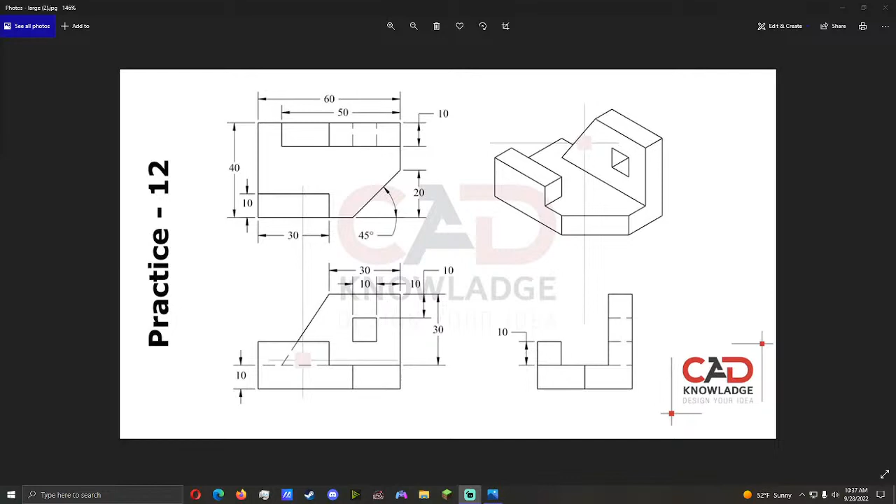Right now I'm just trying to make a whole new scene for this. Let's look for a game to capture specific window... it's not, well let's see, hold on, get rid of this. All right, you know what, let's just do this because I know this will work. We'll do... display capture, there we go. All right.

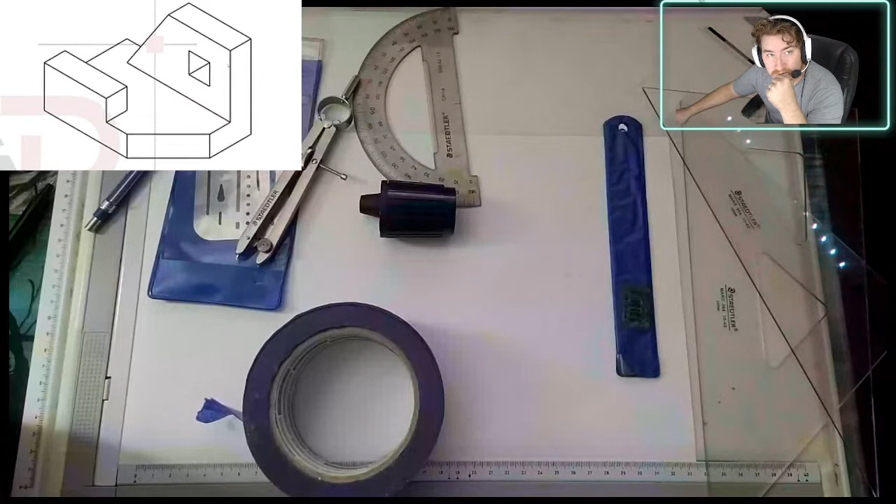See, now I can like... yeah okay, oh screwed that up... dun dun dun dun dun dun dun dun. All right, this and go right here, actually.

Welcome. This will be the absolute beginning of what I hope to become a series.

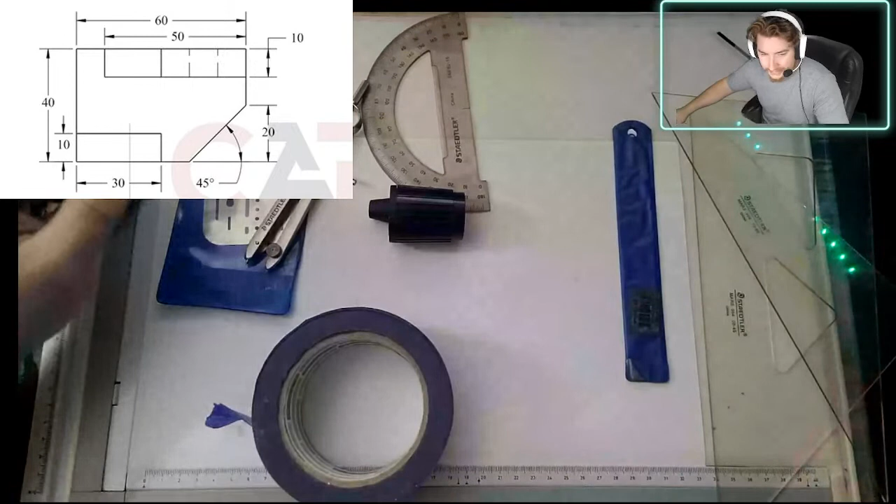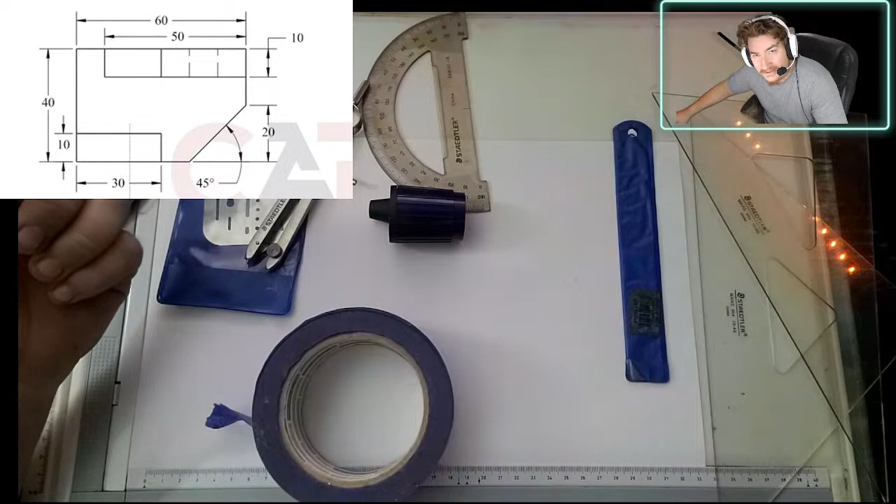We will be going through this and seeing what I can remember from this. God, was that almost 18 years ago? Man, so yeah, it's gonna have been a while. Anyway, I'll be explaining, and if there's any questions, please let me know. I'll try and answer if I know what it is. Otherwise, we're just gonna keep going along here and seeing if I remember what to do.

All right, so anyway, this is what I'm going to be drawing today. I have a ton of different tools. These are my triangles. Okay, there we go, sorry, they're kind of hard to see.

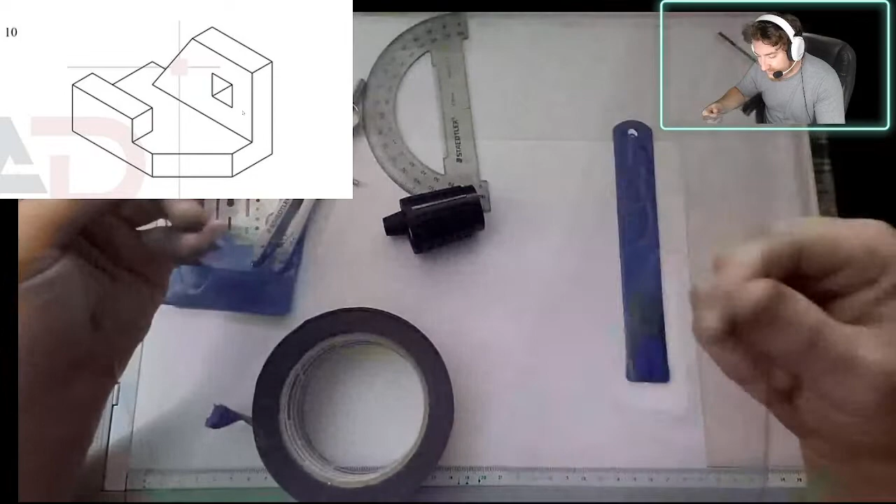I can't remember what these are. This is a 90-45 and this is like a 30-90-60 or something, this one I believe. Don't yell at me, I know I'm gonna get some of this wrong. Oh my god, these are from high school. I still haven't thrown them out, as I figured eventually I'm going to be using them again.

This drafting board is actually something really kind of cool. It was a gift for Christmas one time, and if you press right here, these edges pop up and you can slide the paper in, so that takes care of two of the edges, and then you just gotta get that paper tight. All right, there you go. Brand new, I smudged it. All right, cool.

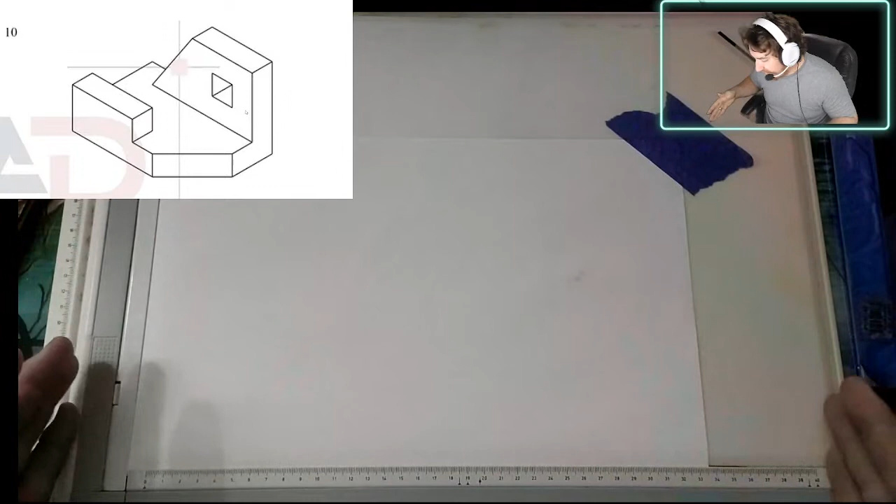It's a really cool piece of stuff. These rails on the side actually had pieces where you had a hole across the side, like a straight edge, and you could go up and down. It had things you could attach to it. I did get another one by accident, so I might bring that one out, but I don't want to open it because, I don't know, I just don't feel like opening it. I lost those pieces a long time ago, and that'll just be that for them.

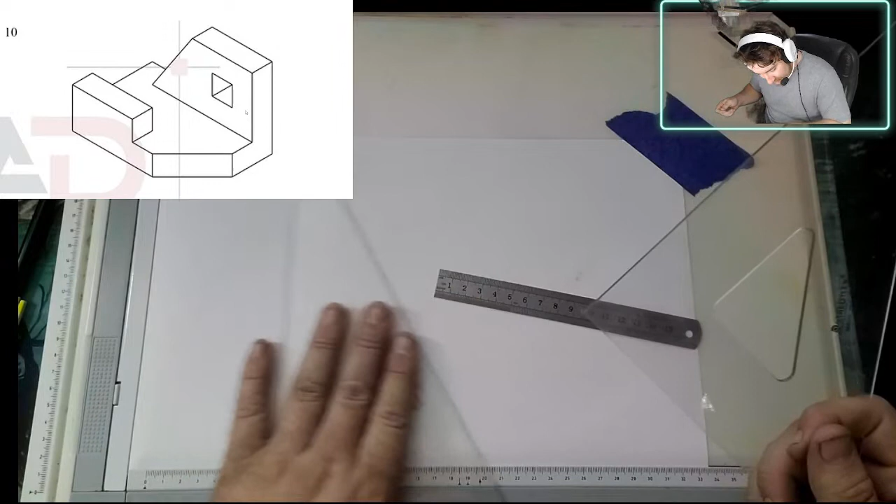This is the star of the show. I will be using a metric ruler because I like drawing in metric. Inches are confusing and scary, metric is so much easier to understand when you're drafting. A lot of stuff will be in... maybe I do need that piece. I mean, I can get along without it, but... I might get that piece, hold on.

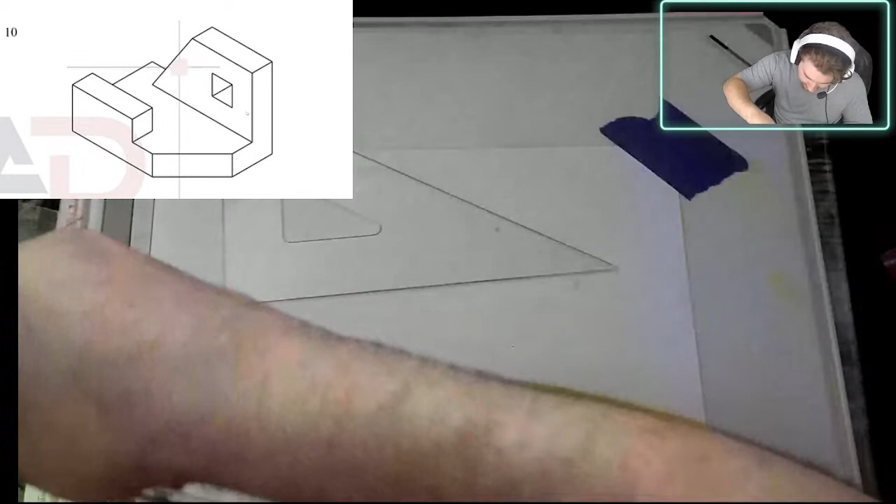So this is one of the other pieces I was talking about. It's supposed to just slide in, slap down, and then these work much nicer. But it doesn't really want to slide at all. Oh okay, I got it - it only wants to go up.

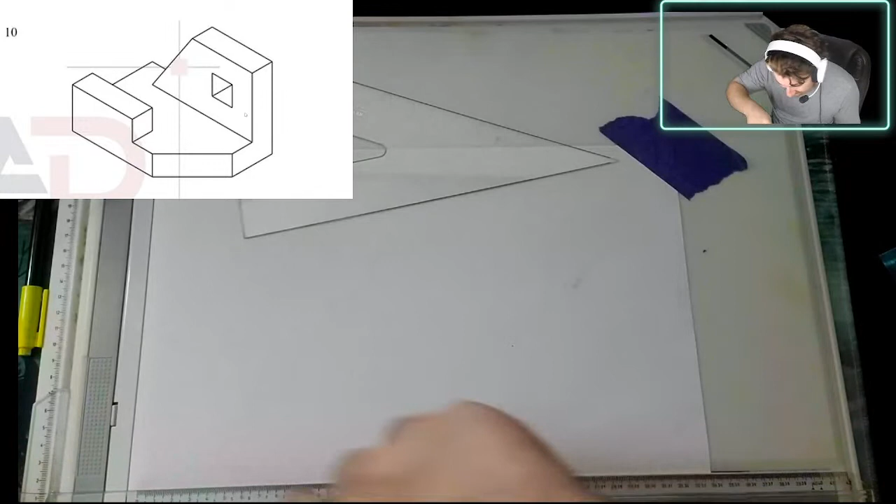Now see, that's very interesting. I don't know if you can see it, but on here, zero doesn't line up with zero on these, but it's relatively close. Well, that's just kind of disconcerting though. One of these is very off - when you get to the end, it's about a millimeter off.

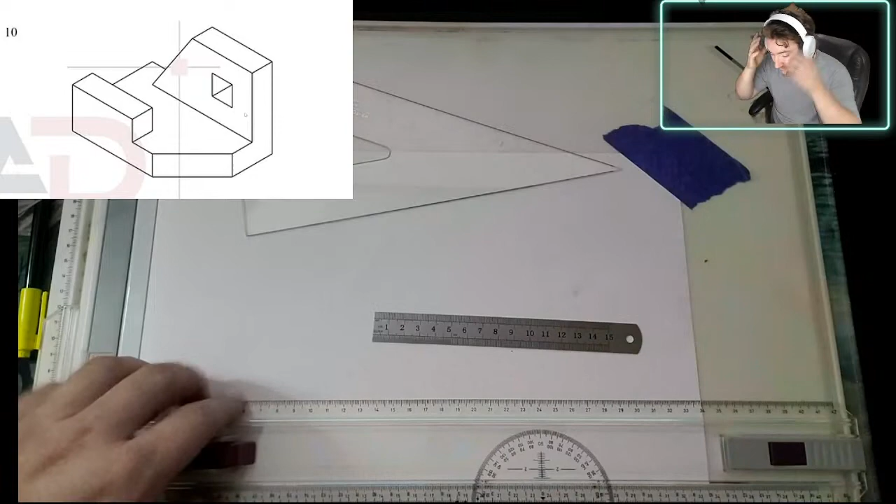We'll figure that out later. It doesn't really matter, I'm not using these measurements. I will only ever be using this. I'm not wearing glasses, so don't put your glasses up higher, Margo.

Okay, anyway, let's get to this. What we're going to do is true drafting, and what that means is I'm going to draft the entire part right here, 2D, and then I will 3D it up in this corner, like this. So let's get started - there are a few things I can help you understand.

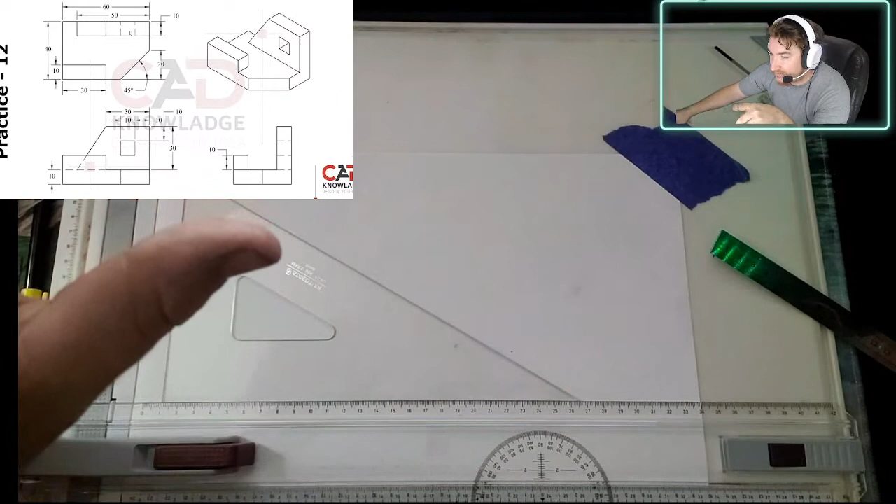This spot right here, that is this hole. Now clearly we can't see this hole top down - these are hidden lines. So if I were to look at just this one, I would know that there's some kind of hole or gap on this image. The thing I wouldn't know unless I looked at the front view or side view is where that hole is.

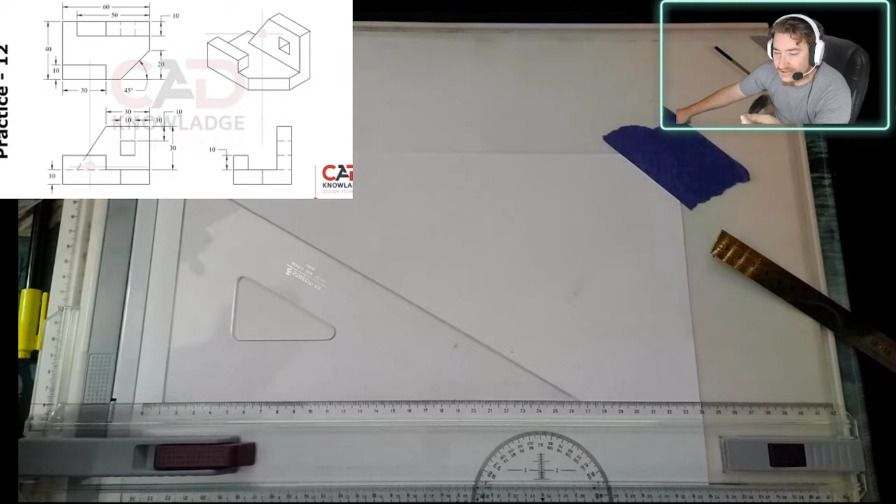Now on drafting, you don't want to over annotate it or over dimension it. These are kind of like Sudoku puzzles when you're drawing them out. You're going to try and find the view that shows the most detail, which it looks like it ended up being the top-down view. You're going to use that one to dimension it the most, because where this piece right here, that shows it's 10 millimeters thick - you don't need to tell me that here. The only thing it needed to tell me here was that this piece comes up 10 millimeters.

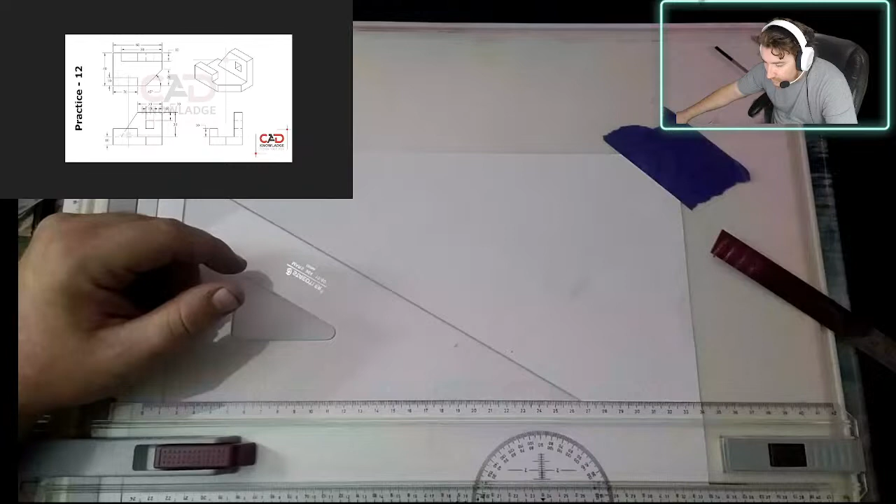Objects like this are a little more fun for me. You know what, let's do this one - I want to do this one. So in this one, I don't have top-down views or side views or whatever, I just have what it shows me. So for this one, I'm going to be doing the top view, the front view, and a side view, and then it'll be up here in the corner.

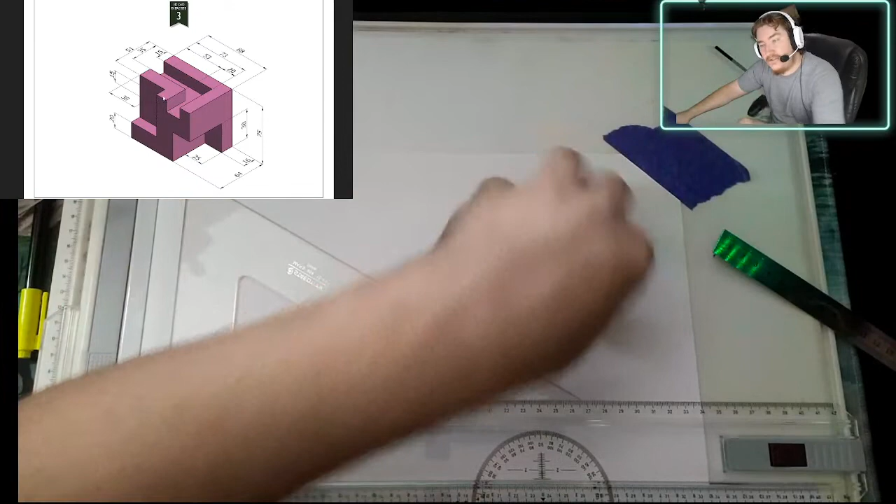So the challenge is I don't actually have a whole picture to take off of - I just have the object and the measurements. Seeing as these are actual exercises, I'm sure not everything is going to be as detailed as it can be. There are going to be places where I have to figure out what's going on here, and that usually means like, okay, I see that this is 88 millimeters, this is 75, 60 - okay, so it's an 88 by 64.

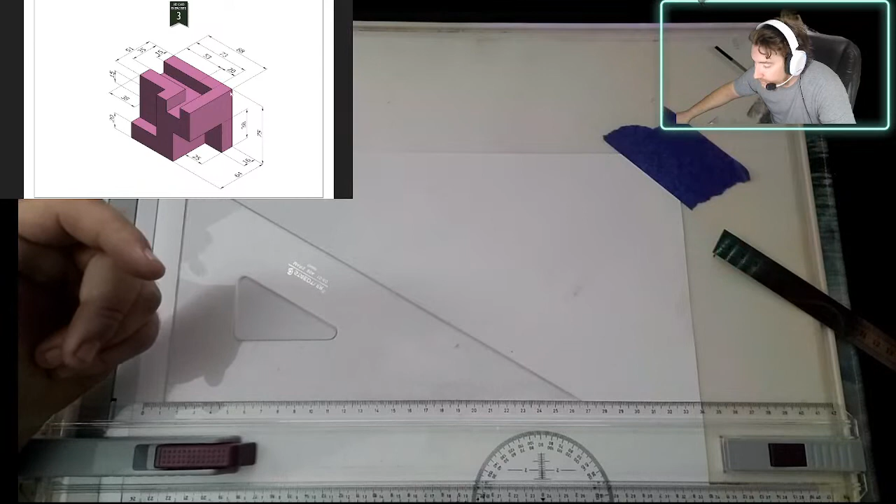And the fun part is these are not round numbers. It's so easy to do nice round numbers when you're doing a CAD exercise, but they like to throw very precise numbers at you so that you'll know when you've screwed up, when things don't line up. All right, so let's get started.

Anyway, I have my triangles. This is my very special drafting pencil - it's basically a mechanical pencil that you put a piece of lead in, and it comes with a very special sharpener, because I'm sure you're asking, how do you sharpen this? Well, you take this little sharpener, and what you do is you have a fat point, and oh man, I need to get a light. This isn't going to work, hold on, let me find something, I'll be right back.

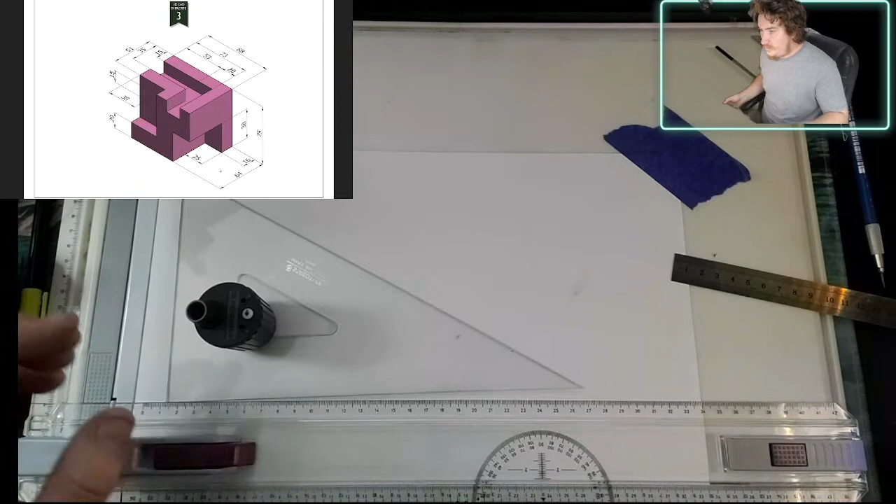Hopefully that works. That causes a giant shadow. Anyway, well, we'll figure it out - this is only the first video, so I am expecting things to go wonky.

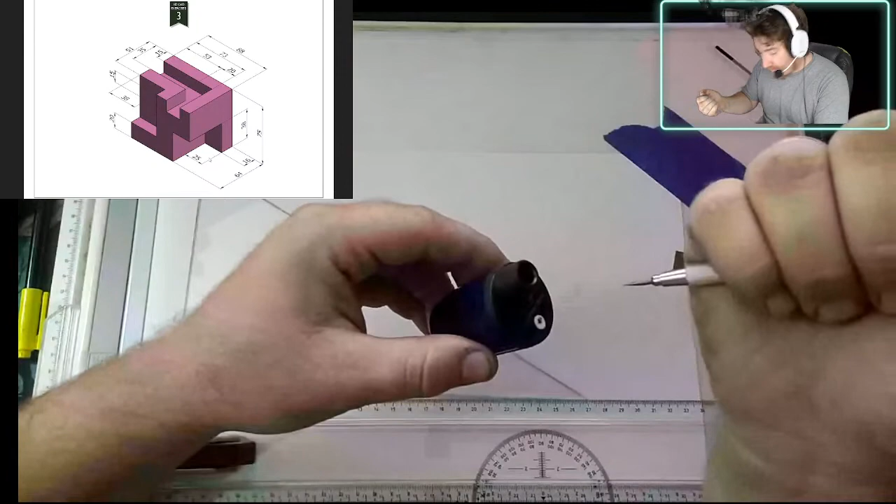Anyway, so there is a fat point and a sharp point. Now what you do is you take it and stick it in the hole, bring it all the way down. If I were to sharpen this, it would give me a nice fat point, but I want the sharp point, so you put it down in this hole, and I take this and stick it in here, and then I spin it. And I think I just broke off the tip - it's good enough, all right.

Oh, I don't have an eraser. That's what I'm missing - that's the one piece I don't have. Of all things, I don't have an eraser.

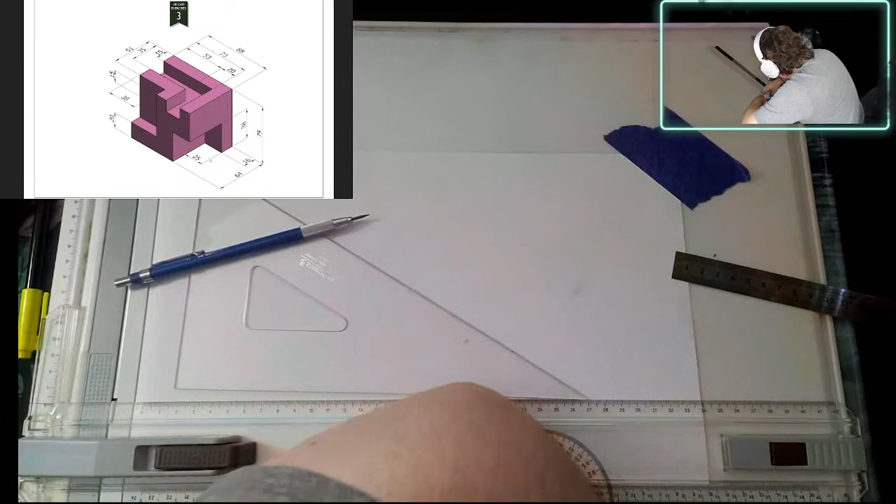Alright, we're gonna do one of my more artistic tries. We're just gonna do a no erasing version. So, okay, I need to go buy one of those. Anyway.

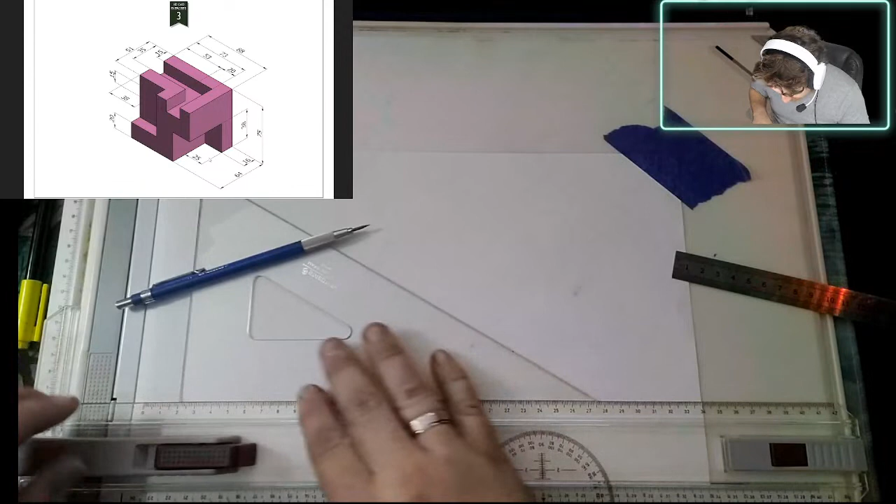I'm just gonna draw this line right here, cause that's gonna be where...

I'm just laying out my drafting space. It is not something you typically do, but seeing as I'm getting older...

Alright, it just helps me. But yeah, you can barely see these lines that I'm drawing, which is honestly the goal of that. But alright, so for this, we zoom in on it.

We're doing the top down view. Hold on, let me take a look at this. Yeah, so I believe that the top down view is going to give me the most detail.

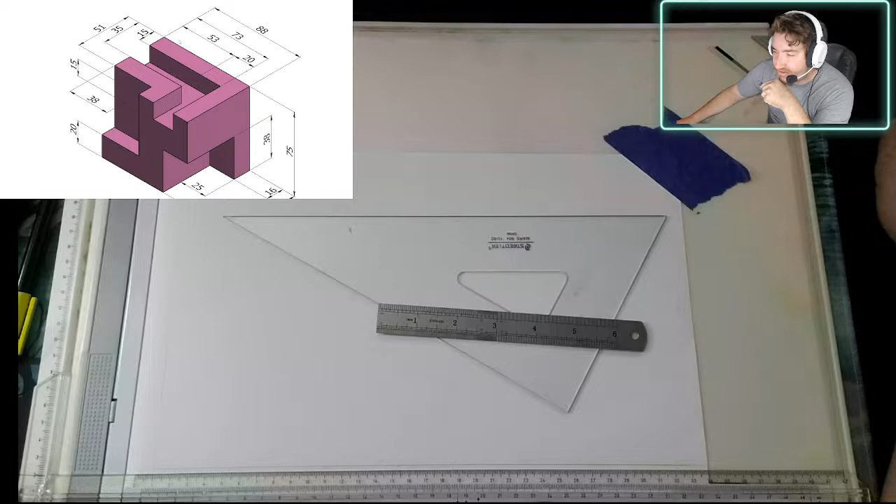And where I'm going to start is right here. This is going to be my starting point, so all my measurements are clearly coming mostly from this area. So that's where you want to start.

So we're going to make an 88 by 64 box. And I guess I'll just use this piece first.

80... oh, am I hitting the camera? 88. That's a full solid line, so I'm just going to take and draw that in.

Alright, we have the first line. There we go. Can we even see that? Oh, hold on.

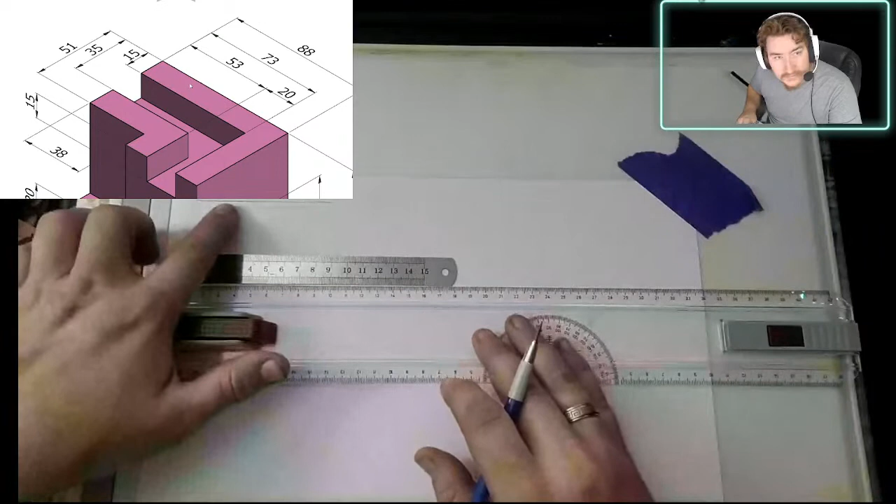Yeah, I'm gonna have to figure out how to do this better. I'm sorry, this is not gonna be as great as I was hoping, but this is my first time doing it, so of course there's gonna be problems. We're gonna learn as we go. Anyway.

So now that we have that, we're gonna go down 64 millimeters. Alright, 64.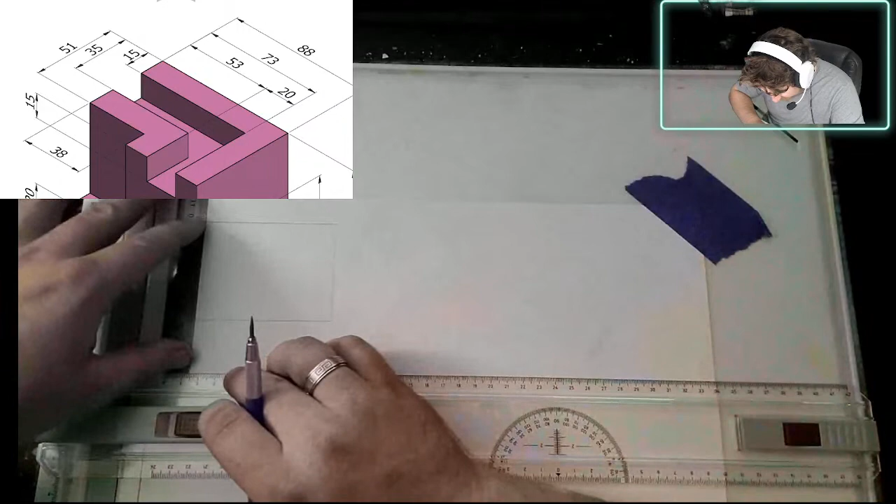And then that's an easy thing to come back to. Alright, so there you go. There's your most important part of this, the main outline of this box.

Alright, so then we're gonna bring this one right here. I know this is very hard to see. So this 15 millimeter, I'm gonna come down from 10, and we're gonna mark that right there.

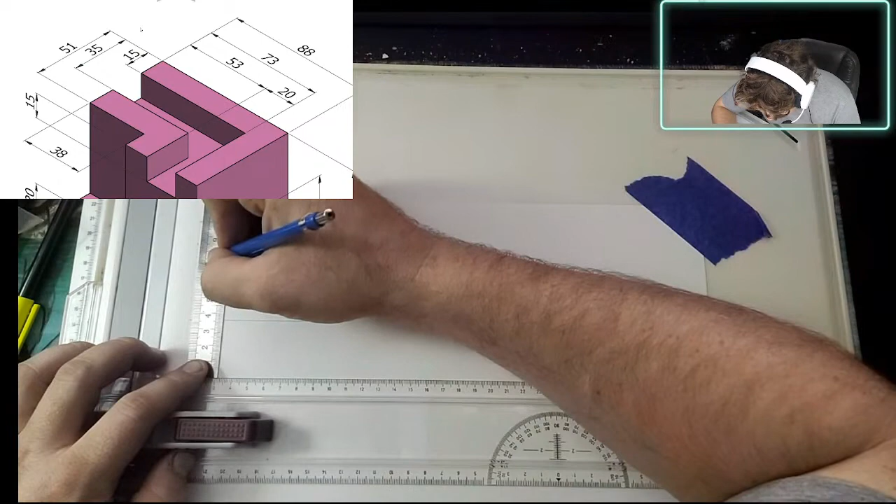And then a 35. That's 1, 2, 3, 35. And...

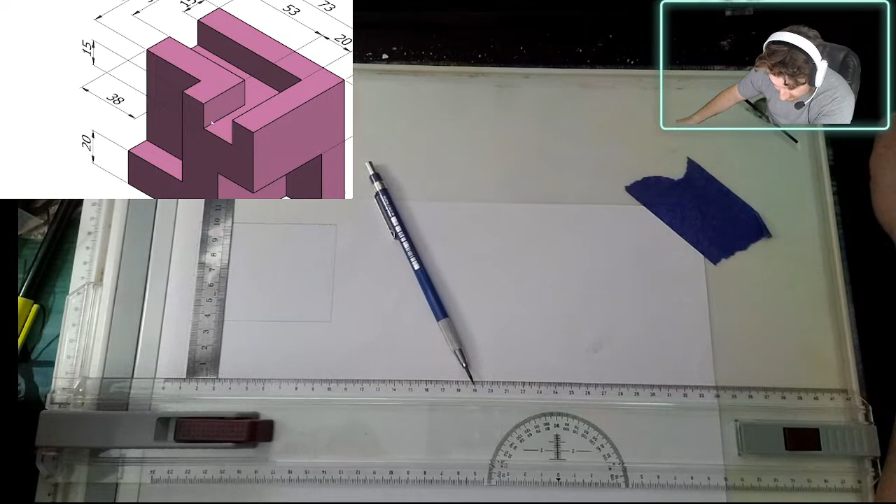Okay, so here's one of the things where it doesn't tell you. It could tell me right here how long this piece is, but it won't, because you don't need to know. As you draw this out, that piece will naturally show up by what you're not doing. That just means that the area will subtract itself. So as you're drawing the rest of this out, it will become apparent.

So now we're going to come over 38. This one's 53.

This isn't looking right. Oh, yep, because that would be 73 and I read that wrong. Alright. Okay, this was 53. Yeah, okay.

And then, so I missed one. Alright, so 51 to that edge. And then it's... this one is 38. Okay, alright, cool.

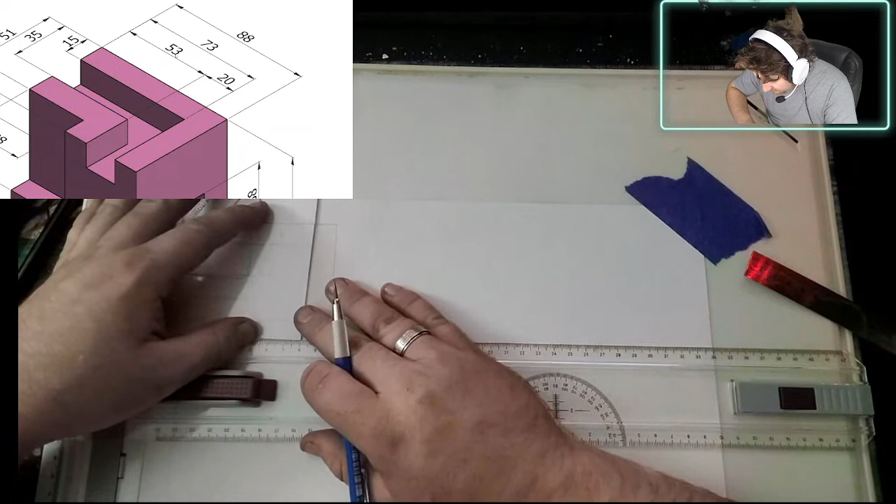So we've got those lines done. And honestly, all we need to do now, since these are all correct, all you gotta do is, oh let's, oh, not get the, there we go. Okay.

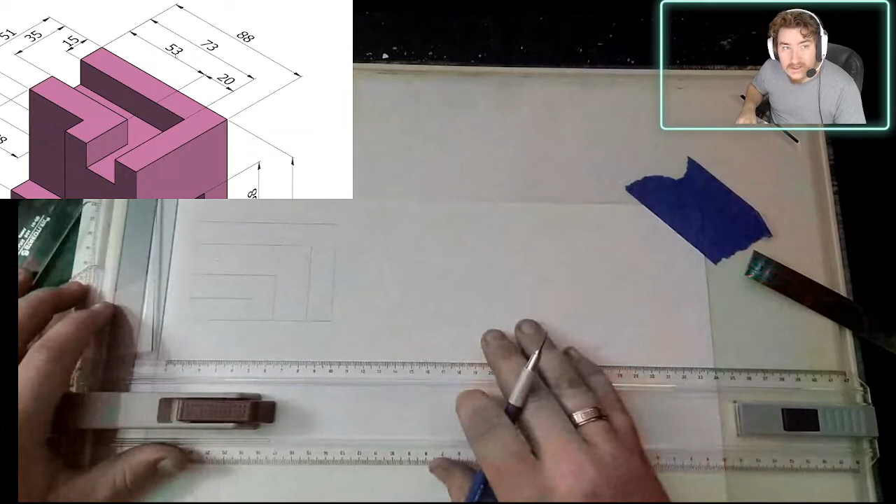Since we did all the measurements on one side, all we have to do is bring these down to meet the correct edges. Alright, there you go. Now we can take this edge and darken that up.

Uh-oh. Oh, I screwed up there just a tiny bit. Yeah, we'll figure that out later. Alright, cool, so that's the top view done.

Now, as I said, this space, which is this spot right here, after I did all of these other spots, this is this ridge, this is this ridge. This spot naturally brought itself into existence just solely out of everything else being drafted.

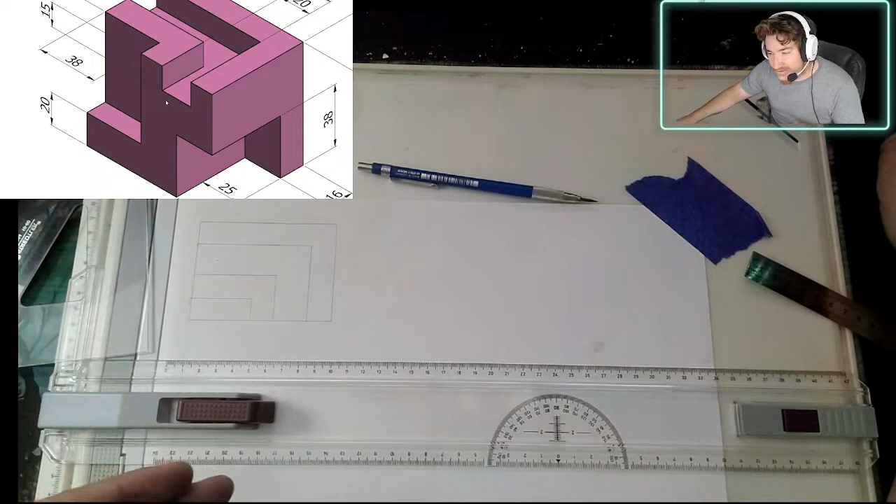The next harder part is going to be this side, because we're gonna have a lot of things here. But the awesome part is, after drawing this here and making it a line down here, means that I can just bring all of these lines down through my image. It's a really great time-saving thing to do.

But the thing that I'm going to have trouble with is, I don't know how, we're just gonna bring it right here because I'm lazy and it's easier. This is not a great drafting board. I can now just ghost a line down.

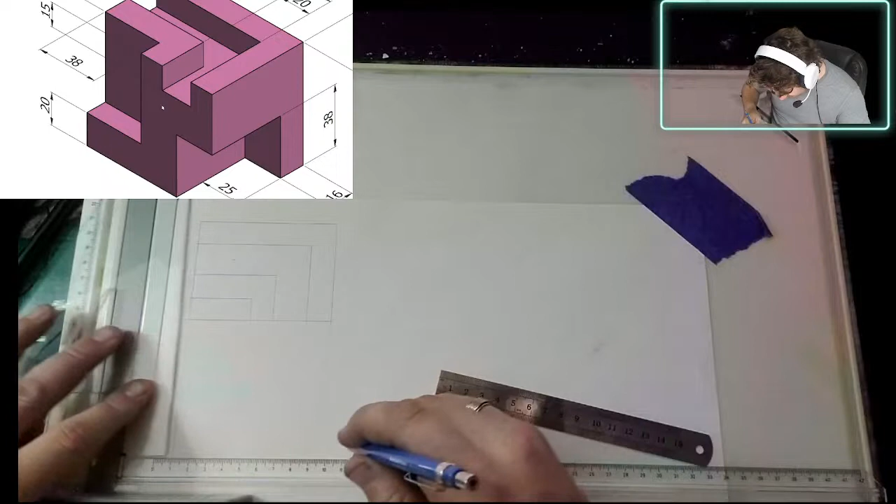And there I go. I have this dimension brought all the way down. You know what? Let's just get rid of this thing. It's in the way. I can do without it.

Yeah, I definitely need another light over here. Oh, breaking things. Hold on. I'm just putting a giant light right here.

Some of the issues you have with clear instruments is that they cast a shadow, and sometimes it's really hard to see what line you're actually up against.

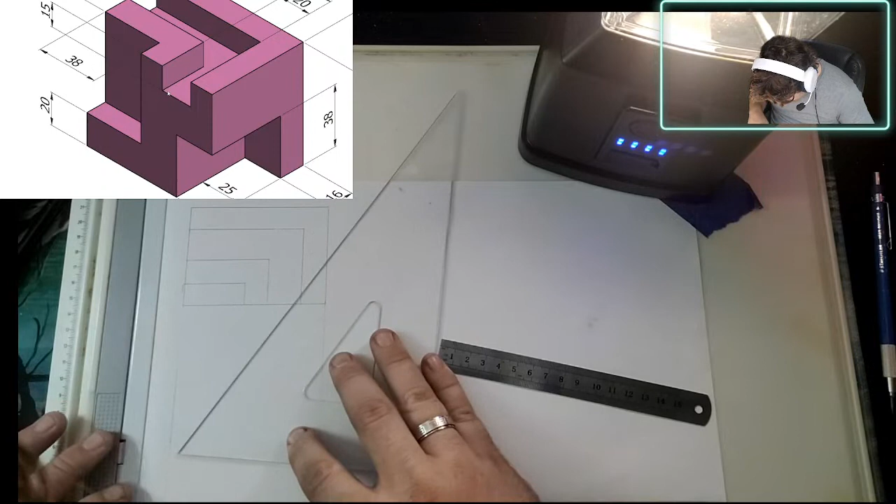So this dimension I'm looking for is 64 millimeters. I gotta get my head out of the way of this. I'm so sorry if that's all this looks like. 64.

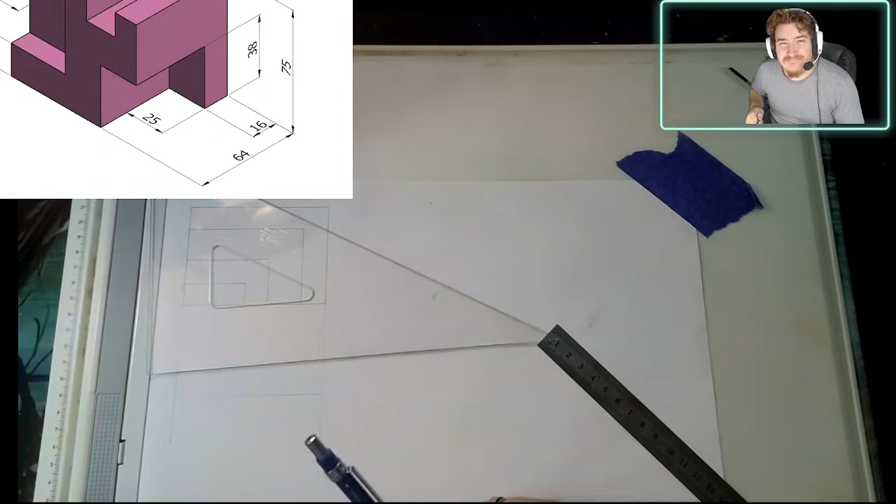That was the wrong measurement that I just realized. I'm not looking at the top down now, am I? I'm looking at this view, which is 75. And now I've screwed up because I don't have any erasers. All right, we're gonna move on. Pretend like that line doesn't exist. You can barely see it anyway, so it's still there, I guess. All right, I've screwed up. I'm human. It happens. That's what erasers are for when you have them.

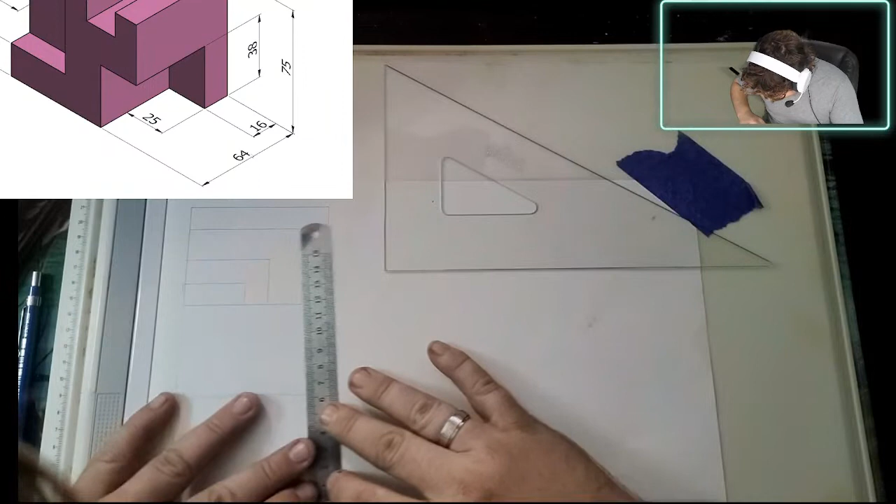So now let's do the correct 75. There it is. I don't know, hopefully that shows up somewhere in there.

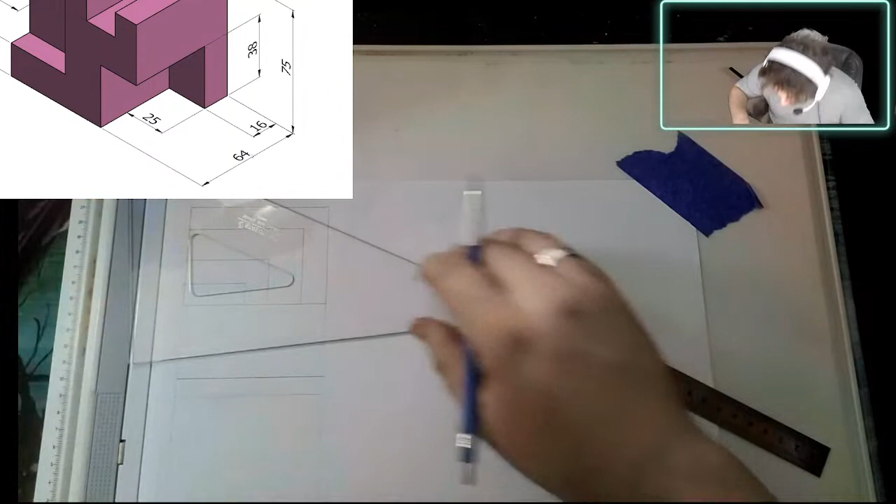All right. So we're now looking at this face. Now I see that we have a 15 millimeter line right here.

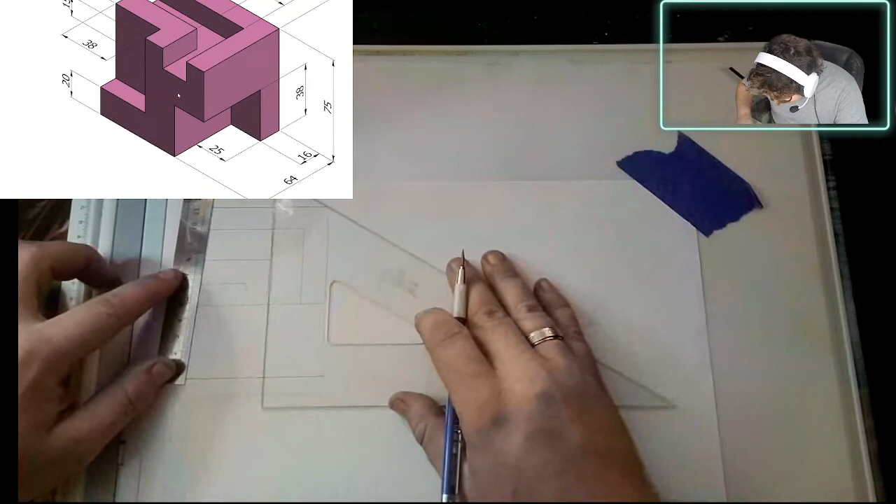Alright, this is where the expertise comes in handy. Not that I'm an expert by any means. Right, so we're gonna take this one.

No, wait, I'm doing this wrong. See, the thing is, you do it like this. Yeah, this is smarter. Okay.

Alright. So now that I have that line, I can now bring this down.

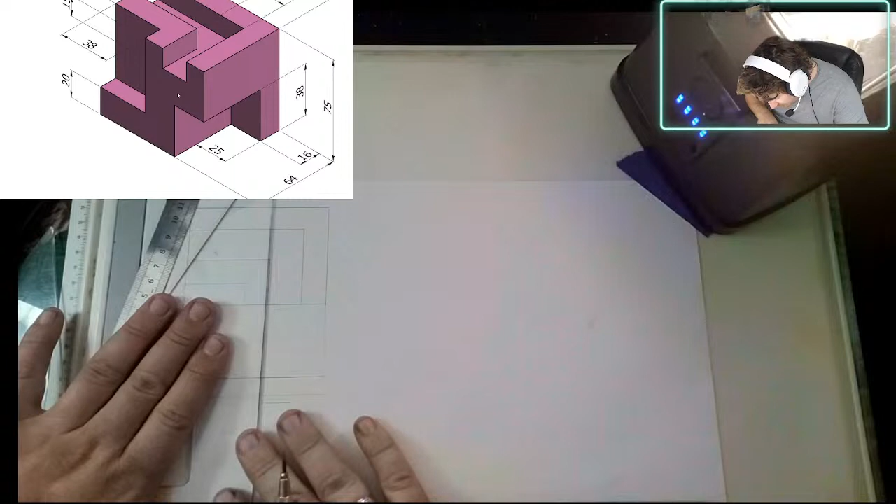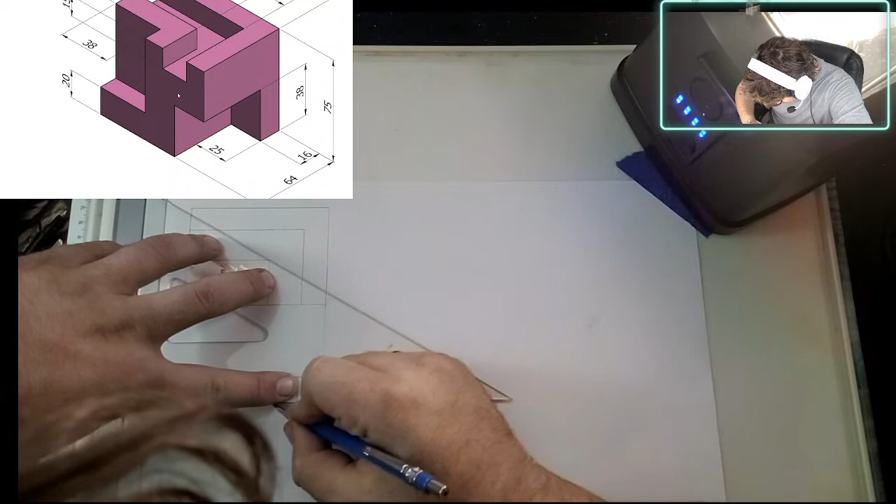I know that's a permanent line. You know what? Here, we'll do this. You bring it not, you bring it almost all the way, and that way you can get a little more precise. I know there's probably better ways, easier ways, but this is what I remember, and this is what I'm gonna do.

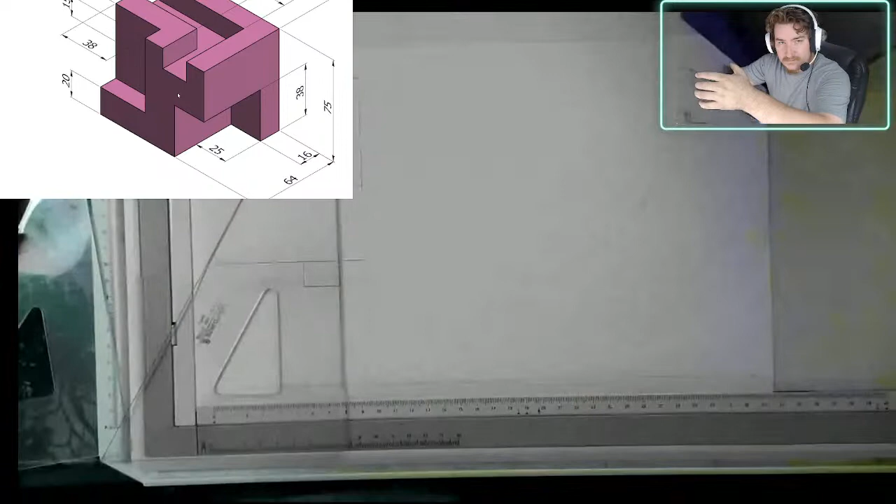I gotta get my head out of the way. Alright, let's see if we can. Oh, that's not gonna work. How's that doing? Am I heading the way now? A little bit better though.

Okay, so we've got that line. It's a little bit off. It's alright, we'll figure it out. This is just really kind of a practice run to see what I remember. Alright, so let's make this 20mm line.

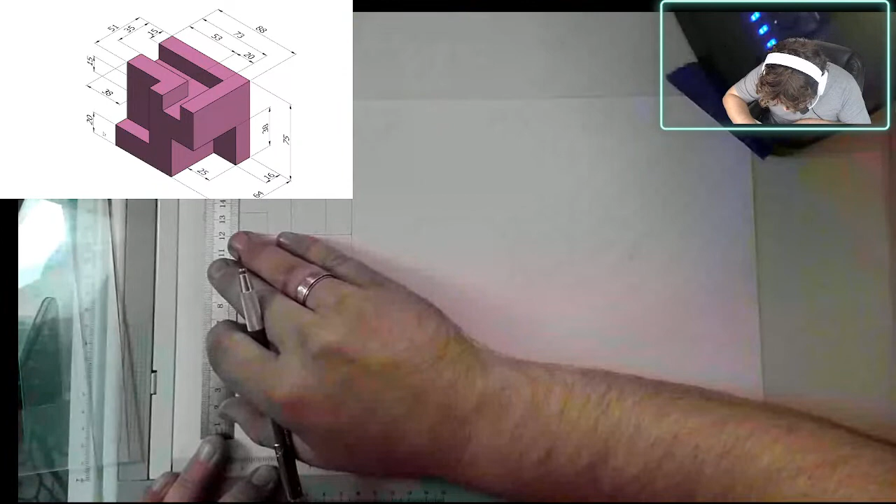There we go. We don't know how far it goes over, but we can get this line by taking this line and subtracting this line from the other side, so this should be alright. Well, I mean, it tells us it's going that far over. Okay.

38. Oh, damn it. That went, yep, see, screwed up. Alright.

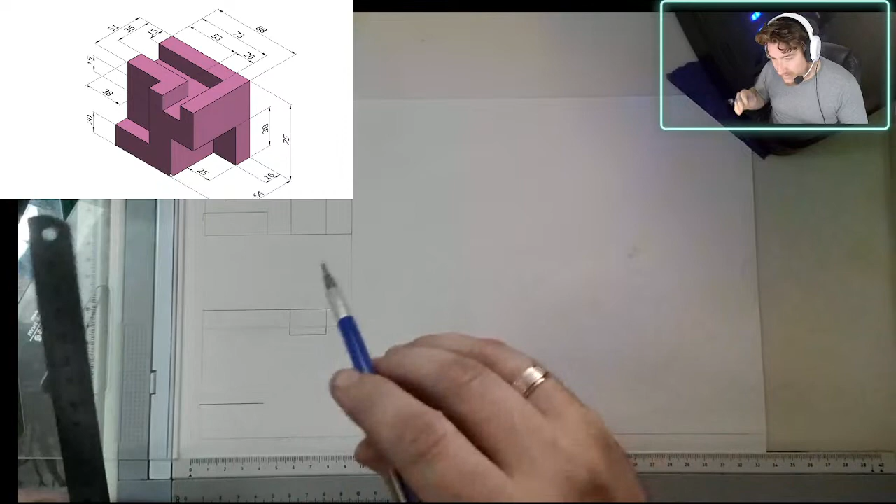See, now the trick usually is you have two of these pencils, one fine point, one heavy point. That way, when you want to draw a heavy line, you're not wearing down your fine point. Because the fine point is for making these kind of ghost lines that you don't really end up seeing.

Okay. And then that just comes all the way up. Like that. Ta-da!

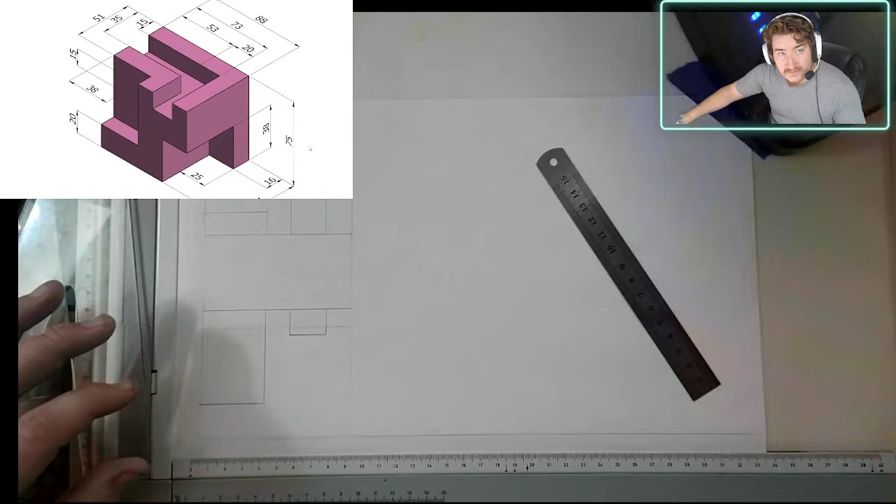Alright, now for this little piece. So I see that we have 38 millimeters right here to get this line. So that'll give us this line. And then this is 25 over.

So we can make 25 by 38.

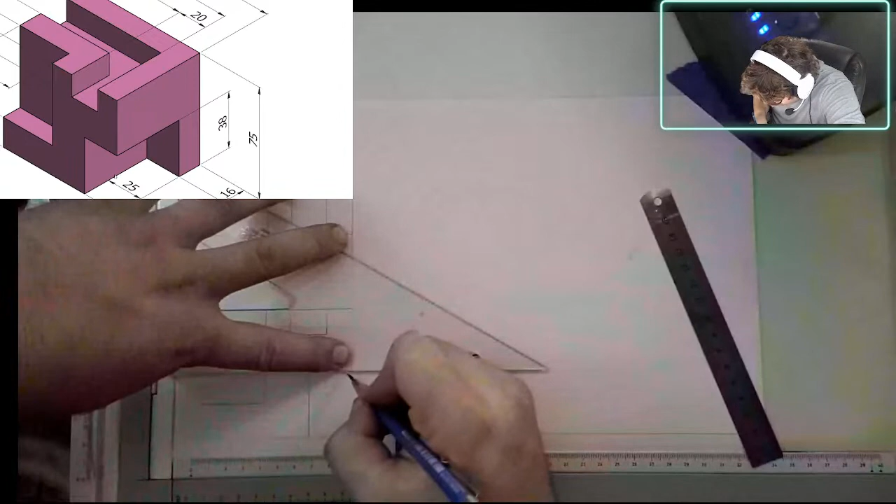Alright. Cool! We did it! That is the side view, or the front view, taken care of. We can now kind of darken up these lines.

Ta-da! Alright, there you go. There is that view. I know it's a little hard to see. Anyway, so that's that view.

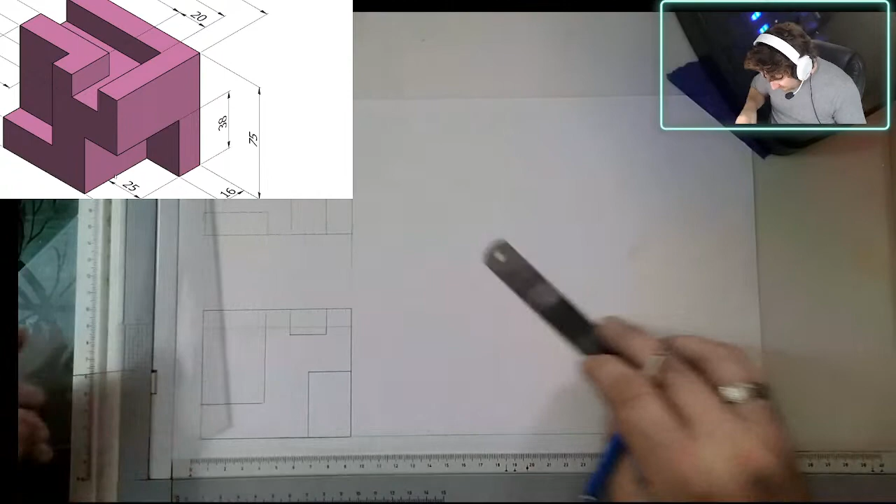Now we're going to work on the side view. And let's see, how far away did we do this? Alright, we'll call that about 45, so we'll do 45 right here.

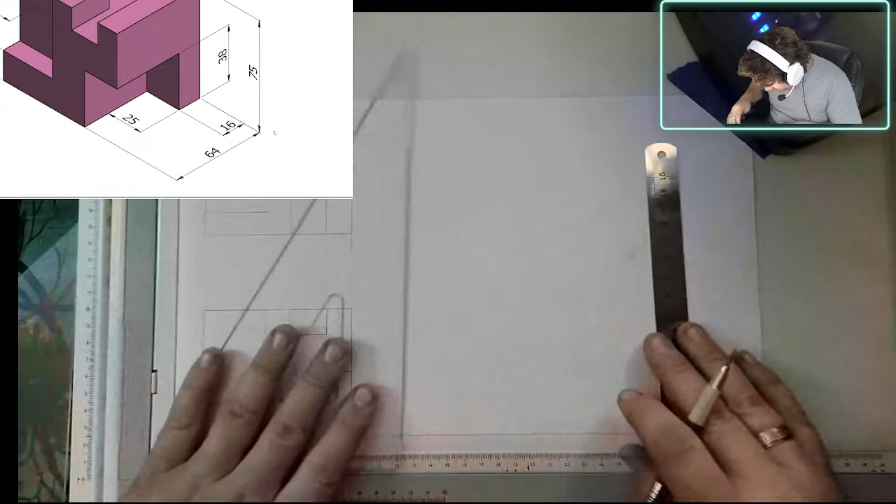Which means this needs to be 75. No, wait a minute, I'm doing something wrong again. 64. This is a side profile. It'll be 75 tall. But see, I don't need to make that measurement because I'll just do this.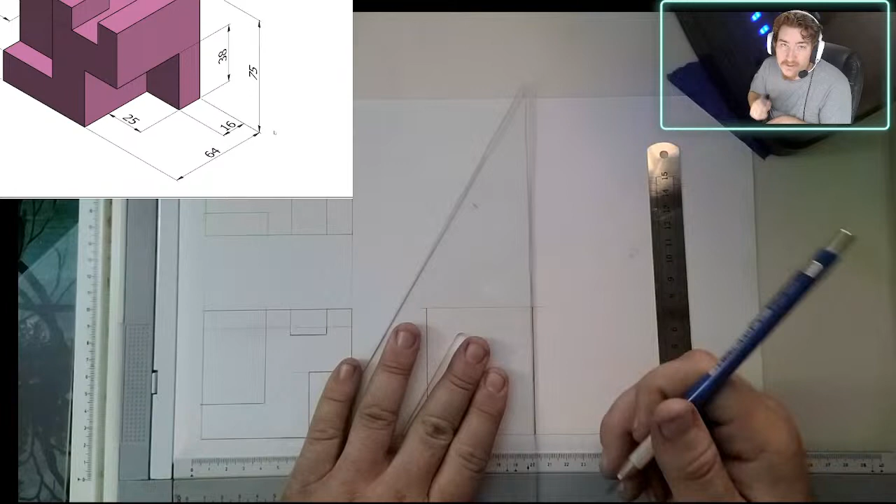One of the really nice things about this is if you were to shine a shadow on this thing, it is just purely a box. That way I can confidently draw in these lines because I know no matter what direction you look at this from, it will have the outline of a box.

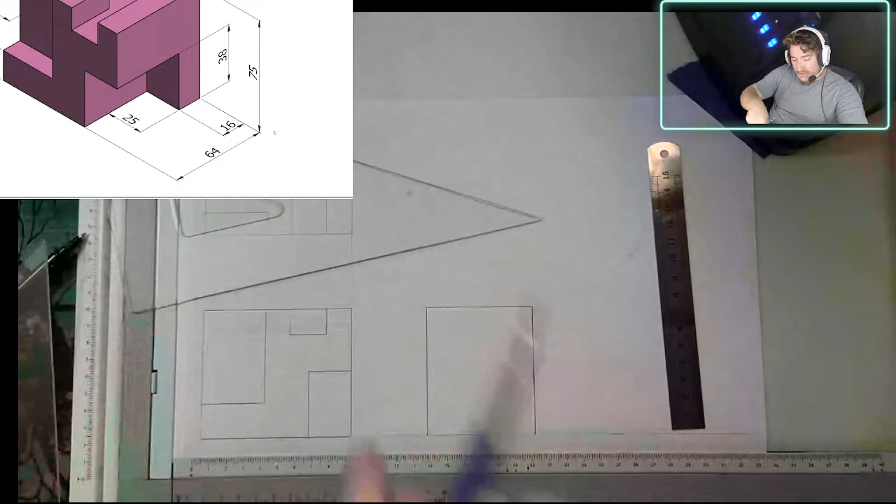Usually you kind of lightly draw in a rough shape of what you're doing. That way, say for instance, if I looked at it this direction, this piece was all I saw, these lines wouldn't be here. But because I know that if I look straight down on this image, or straight at it from the front, I still see these corners because they still exist within this drawing.

Now, what I should be doing, honestly, is creating these hidden lines, which I think I might do. I'm going to go back to that. I need to make sure... oh, that definitely doesn't line up. Okay, we'll go back to that because I'm going to do this properly. I don't think I'm going to annotate this one. I might do that in a future project. But let's get this side done.

Okay, so we have the shape. All we need to do physically, things that we can't see will come later, is do this 38 by...

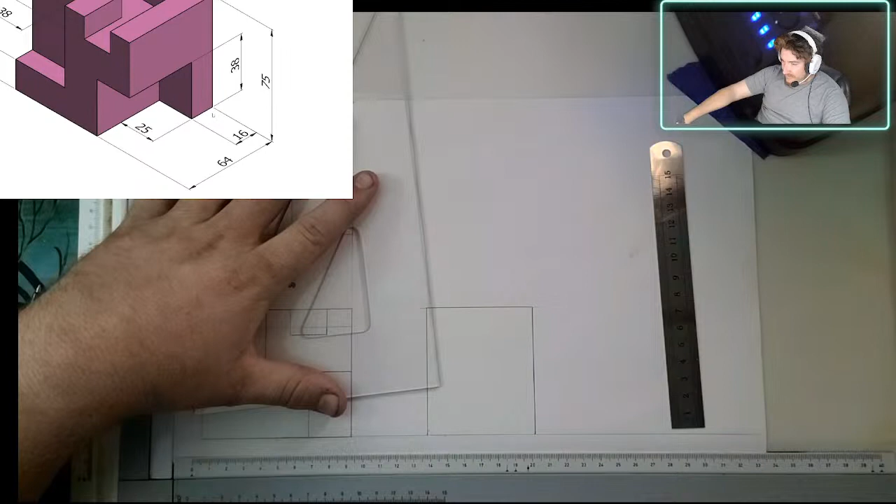Okay, so once again, I don't know what from here to here is because they only give me this one. And from there you can figure out what the shape is. So the trick is to annotate it with—I think annotate's the right word. Yeah, it's technically the right word—by giving you the least amount of stuff to cloud the image.

I don't know what I'm doing sitting all the way back. That's not going to help me. Alright.

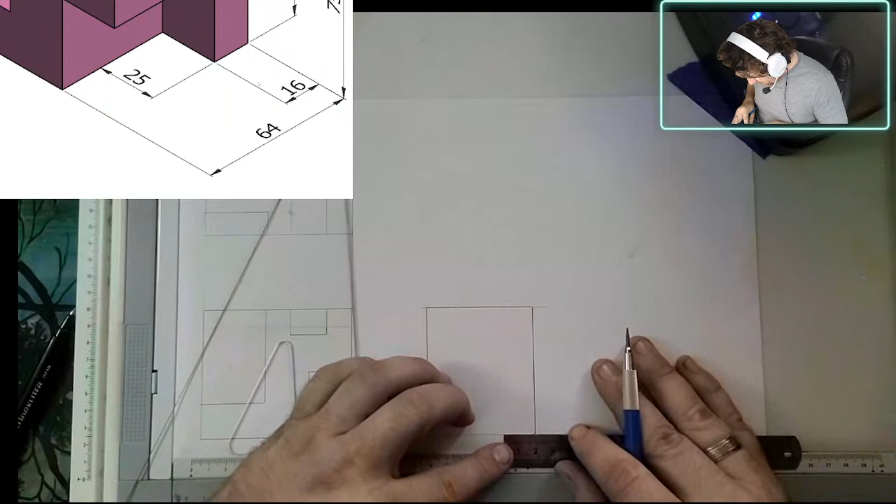Alright, so... yep, okay. And then I'm going to come over here. No, I'm going to come over here with a... 30. 38.

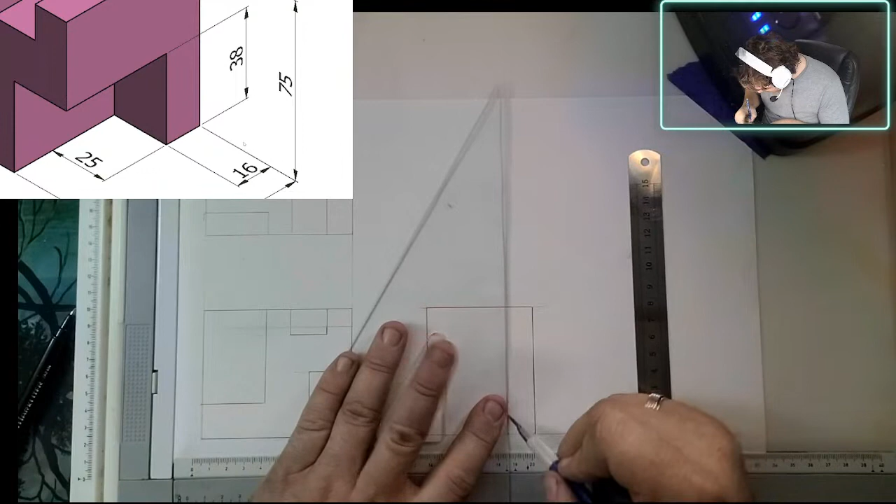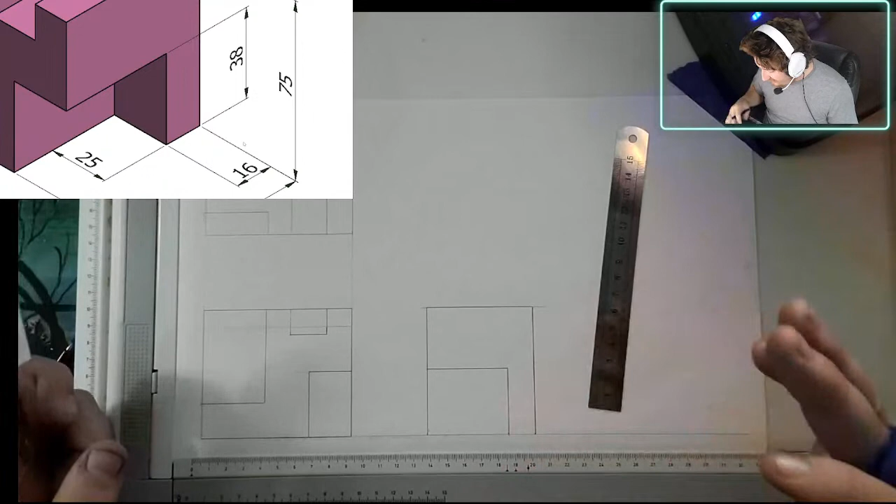This, right now... you know what, let's take this and move it into this corner. Alright, so in a 2D image, this is what you would see if you looked down on it, the front of it, and to the side of it. This is all you would see.

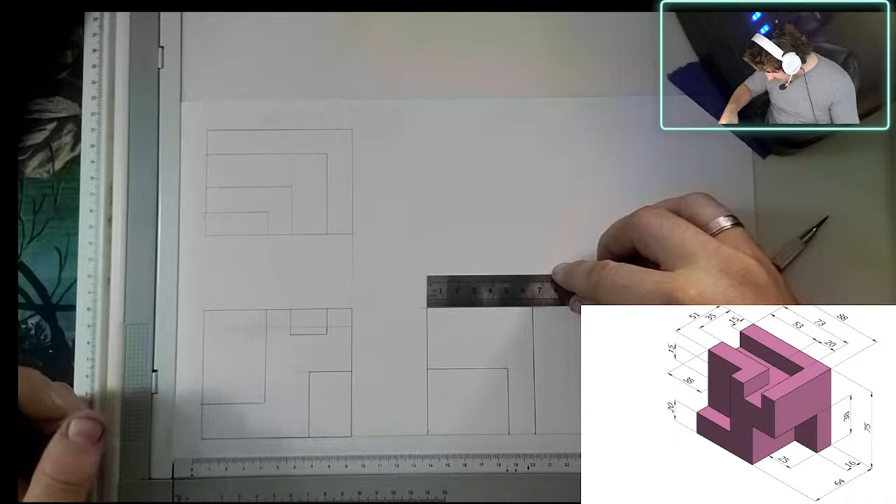This right here, I can do anything with, technically. Since I have it here in front of me in physical space, I can just measure these things. Did I do that right? Yeah, close enough.

But right now, I think we're gonna hold off on this. We'll do the 3D part next time. It's basically where I'm going to make this bit right here. It's not necessary, but it is helpful to people who are drafting, so they can see the 3D drawn object. You can compare it to your drawings here, and it will be measurement accurate. But for now, I think we're going to just leave this here, and that'll be it.

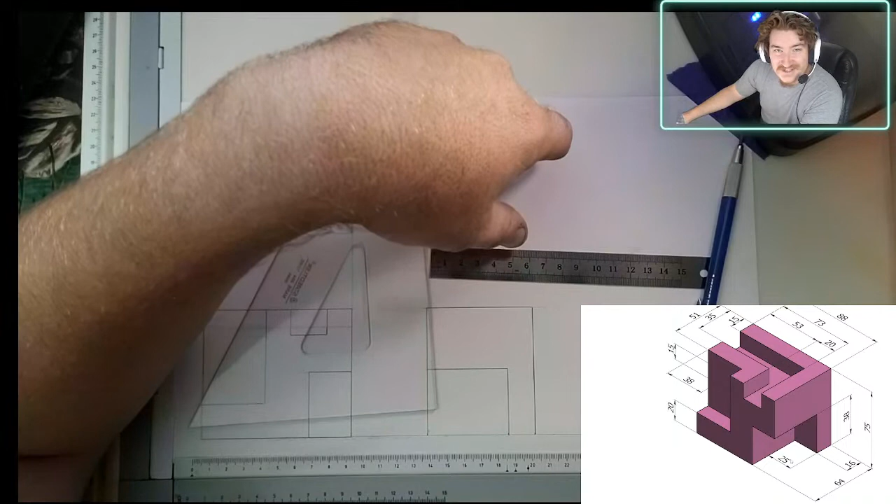So my goal is to take this and go all the way to a 3D physical piece so that I will be holding this thing in my hand at some point. It's something I've done a couple times before, not intentionally. It just happened to work out that way.

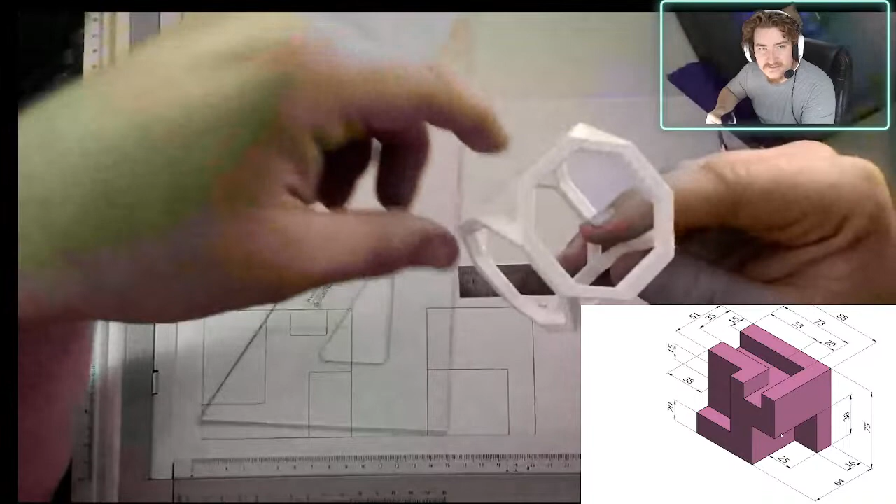But, well, like for instance, I have, let's see, I have this. This is a piece that I drew. I was just drawing something freehand one time, and this is a story for another time.